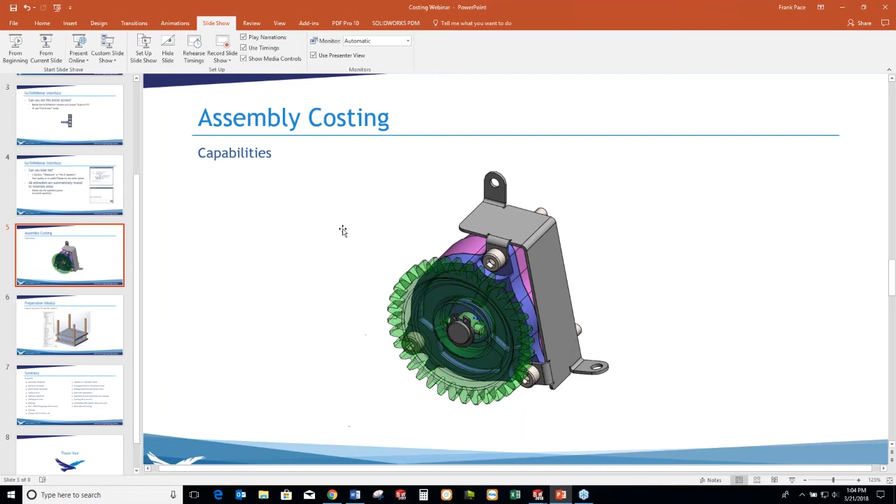So with this, basically what I wanted to do is go over some different types of parts that we could use with the costing templates, to see how that works. There's an assembly template, and there's also a machining template and a sheet metal template that can be used as well. Some other stuff has been introduced, and that generally depends on some basic information from the geometry of your parts.

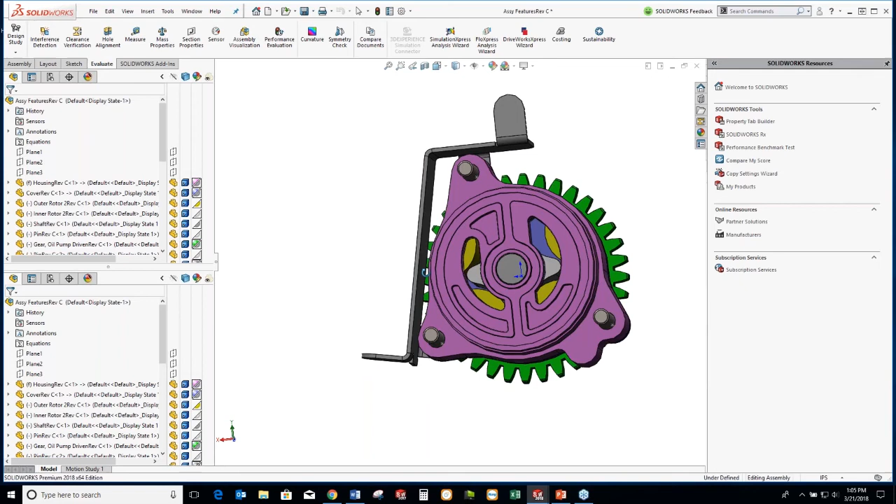So I have this part right here, or model, and I can take a look at some of the complications behind this model that create this whole assembly. Now, what I'd like to do is not only get costs down here, but also have control of the costs.

Costing is available for anybody with a professional license or premium license, and the premium license just lets you take advantage of the assembly templates. If not, you'd have to do it individually. In any case, there's basically a need to go through part by part anyways. There are just a few other extra things, and we'll go over what assembly templates would cover in a premium license. Costing is an evaluate feature.

So up here on the Evaluate tab, I can immediately start a costing for the assembly. Usually what you get over here are a lot of your default settings. You can see some of this I've changed around, and I've added these as I moved along.

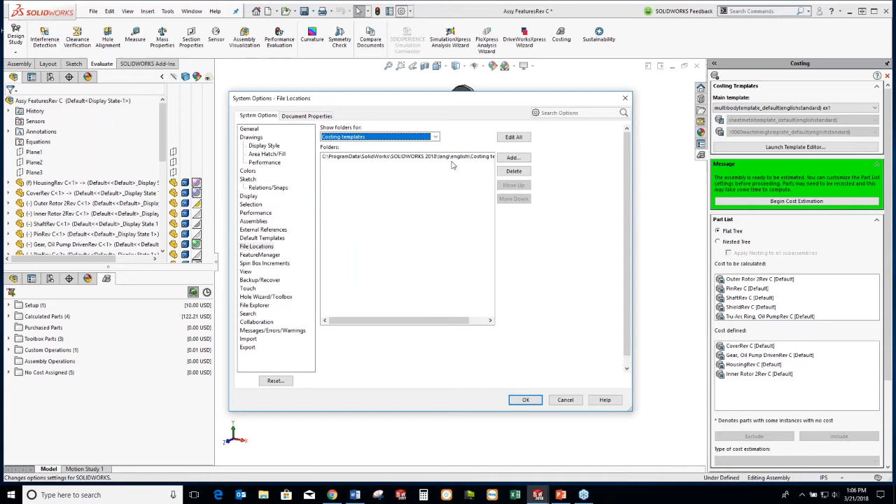Where those get saved are in file locations under costing templates, so you can go back to that, save it out, or change it if you need to. We'll take a look at all that. First, we'll just go ahead and set this up.

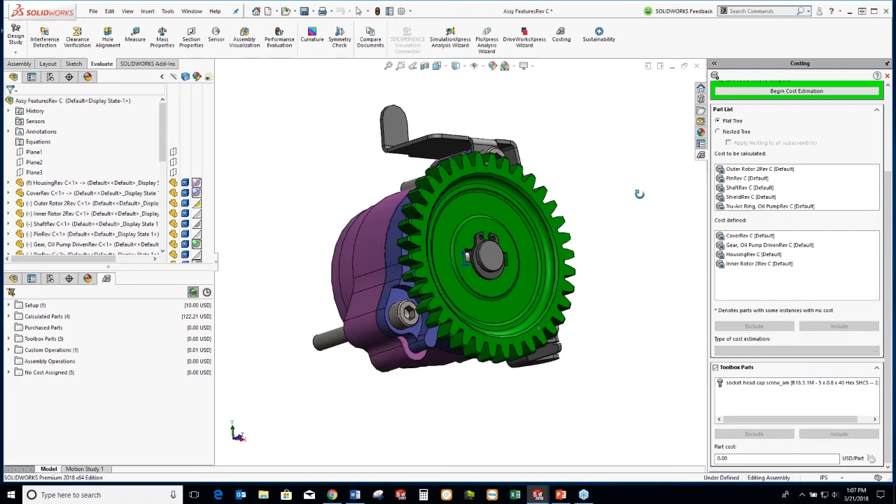One of the things I've noticed is great here that they've introduced is the toolbox parts. Toolbox parts were introduced in 2016, but if you don't have that selected when first doing a costing, it makes it a little more difficult to get that folder out. So what I have here in my assembly is three bolts that I want to account for.

Keep in mind that a lot of these parts, costs, and numbers may not be very realistic, so I'm just going to throw in some numbers here and there, and then we'll show where it's being affected. Here, for example, I'm just going to enter 225 for each of those toolbox parts. Then, when I hit Begin Cost Estimate, it'll pull the assembly template, which is tied to these two types of templates.

There's going to be a different template, one for sheet metal and one for machining. I'm going to go ahead and click on Begin Cost Estimation.

All right, so this quickly gives me some numbers, but it might be deceiving to think I'm pretty much done. Obviously, I have to go through and make sure things look correct. Not only that, but some of the stuff will usually go to a different interpretation, or the immediate first interpretation, of what that part can be costed out to be.

So let's first take a look at what's going on here, what we see. We've got current, previous, US dollar, and quick buttons for generating a report and doing a costing pack and go. We're not going to touch that. First, what we really want to do is dig in a little bit and see what this looks like on the inside.

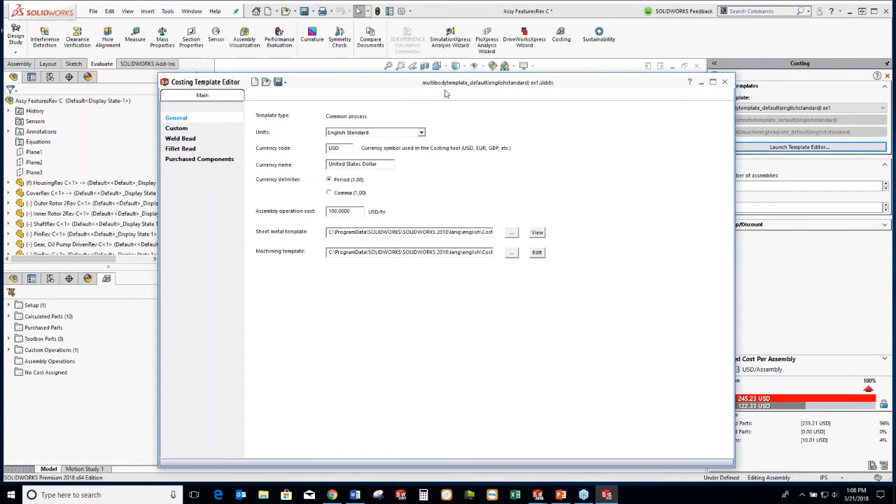So the launch template editor allows me to come in and make some edits. But one thing to note is that if you're starting out and want to try this for yourself, you'll notice it's going to say read only, so you can't really play with the template itself until you change that and save it as your own template.

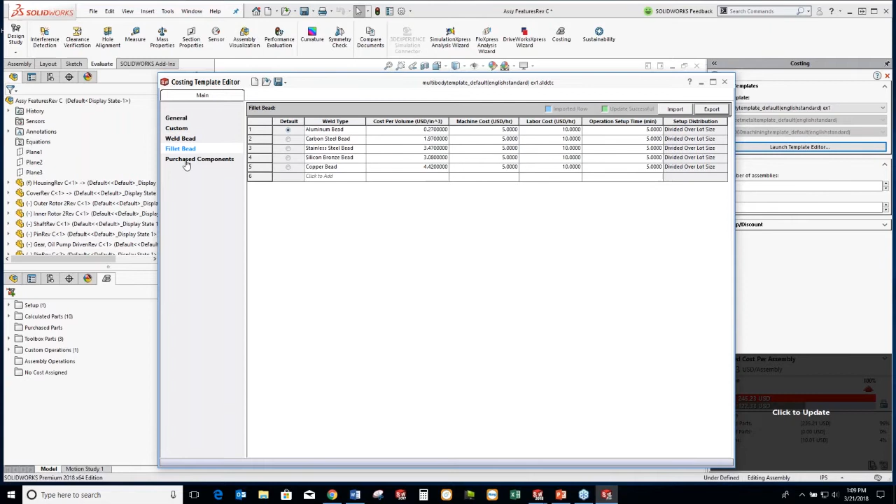After that, you can make changes. What you'll see down here is that you have the ability to add and take advantage of certain things. There's a whole gamut of things for the costing area, so we're not going to cover everything. One thing we're not going to cover is weld beads and fillet beads, but that stuff can be accounted for. And purchase components, but we can do purchase components individually, and we'll be doing that later.

So here on the main page of our assembly costing template, we've got a few options here. We can override with a certain dollar amount, or basically what it'll do is default follow these sheet metal and machining templates.

So I can take a quick look to see which one it's referring to. Here I was dumping some in there, but let's see. It's the sheet metal default English standard that it's pointing to right now, so I'm not going to change that. I could browse through, or I could take a look and see what that sheet metal has firsthand.

So that's kind of a neat thing. Basically what I did was click on the button next to that browse, and then it shows me the tab here. This wasn't functional in previous years, some of the earlier versions and things like that, so that's pretty recent.

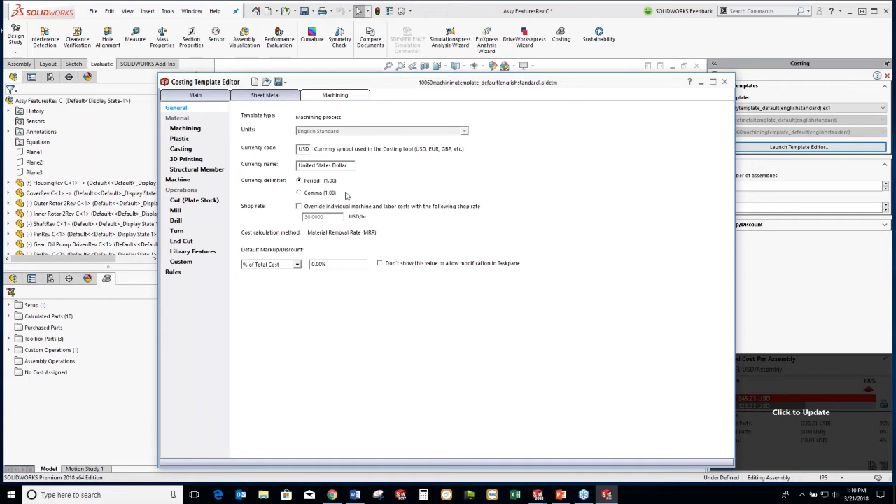If I go to edit the machining, I can take a look at what's going on over here. So basically what I'm going to say here is, for the sheet metal, I'm just using the default one that's included.

In the machining, what I decided to do is just go ahead and change what the quantities were. For a lot of machine costs, they were charging, the defaults have them at maybe $10 an hour, and labor costs they have at about 20, something like that. So I just changed these all the way across the board so that all machine costs are $100 and labor costs are $60 an hour. Just throwing around those numbers, obviously different circumstances, different situations, right?

So getting off that topic now, coming over here, I'll click to update, and that will show me that I've got some of this stuff here costed out. As I float my cursor over, I can see what these costs are telling me. But the best way to look at this is to just start going through some of these parts one by one.

So I'm going to take a look at just this first housing right here, the housing part.

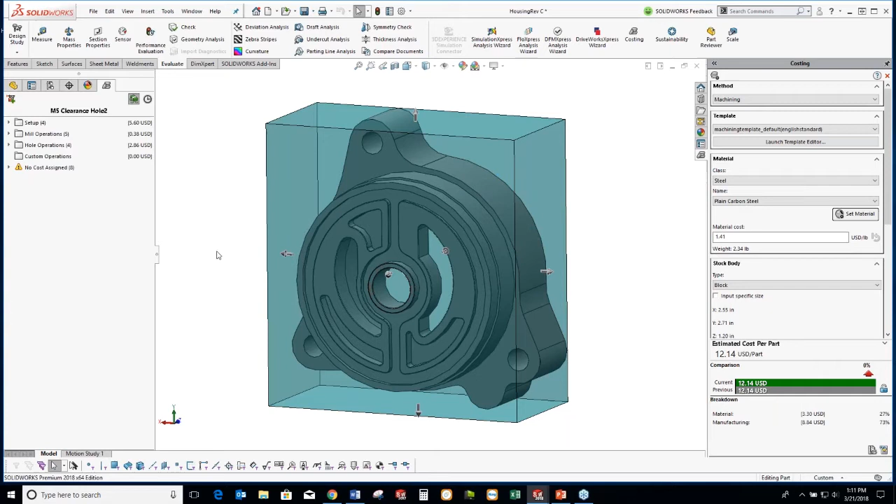Now here at the housing part, basically what I'm noticing is that there's a little bit of a warning here. So I'll take a look to see what that warning is about. And I'll find out that the message, it's a little small, but it's reading: there is no template information for this tool.

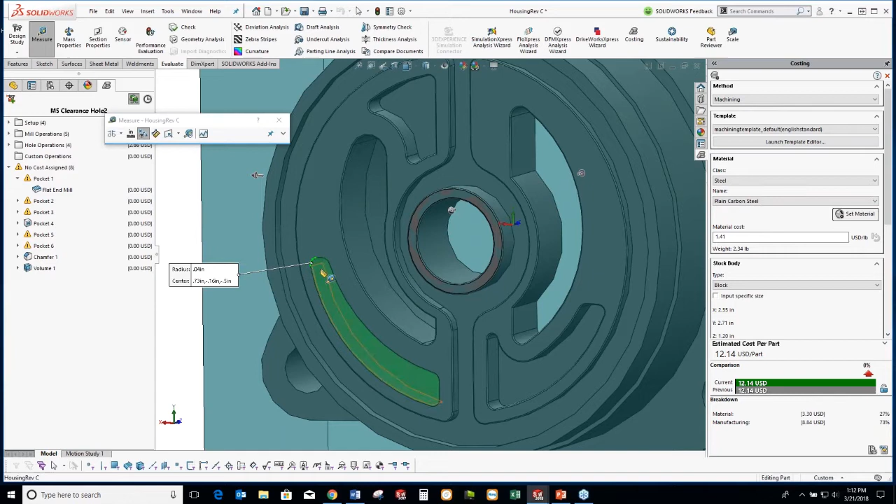And if I click on it, what I see is a pretty small pocket. Now if I wanted to, I can try to see what flat end mill I want to place in here. And this seems to be the problem here for this situation. What I have here at smallest is a 0.375 inch diameter. If I take the measure tool and just measure around here, I can see that that's a lot smaller, and I'm not going to be able to fit that in there.

So I've got one of two choices. I could switch stuff around, change things, or I could override some of these costs. So if individually I wanted to, I could just right click and apply a cost override.

And then those would populate into these other folders. So pretty much the general setup that you have for the costing on this side that automatically populates is that you have setup costs, which may or may not be included or ruled in by your template. Here, what the mill operations do is they'll pick out and look at pockets.

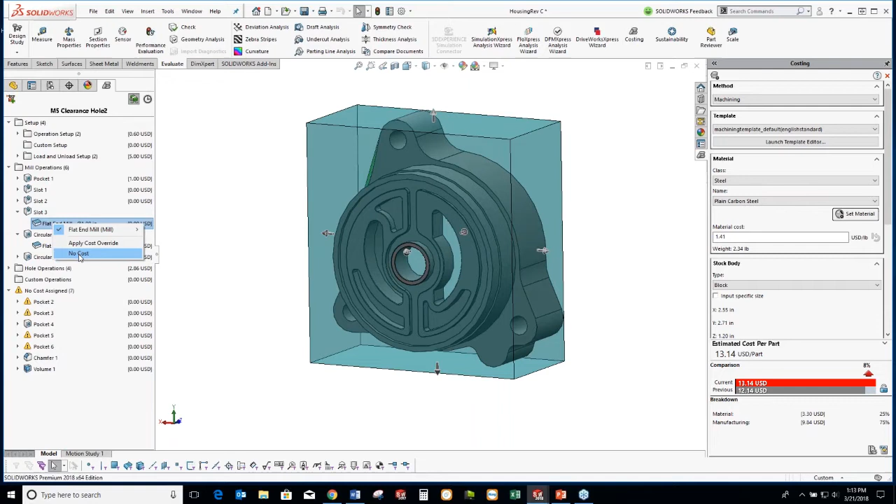And then we're going to look at how that's being calculated and how that gets figured out in the situation. You'll notice that some of these may not be correct, so you might want to account for that. You can sometimes take some of these out, set to no cost, for example, and then that would actually move it down to this area under the no cost area.

All right, so one thing that I could do is I could change the machining template that it's using. I could do that by actually pulling from this drop down. I could make changes if I wanted to. Let me pull this up here, and maybe say in the mill, I wanted to then change for steels, plain carbon.

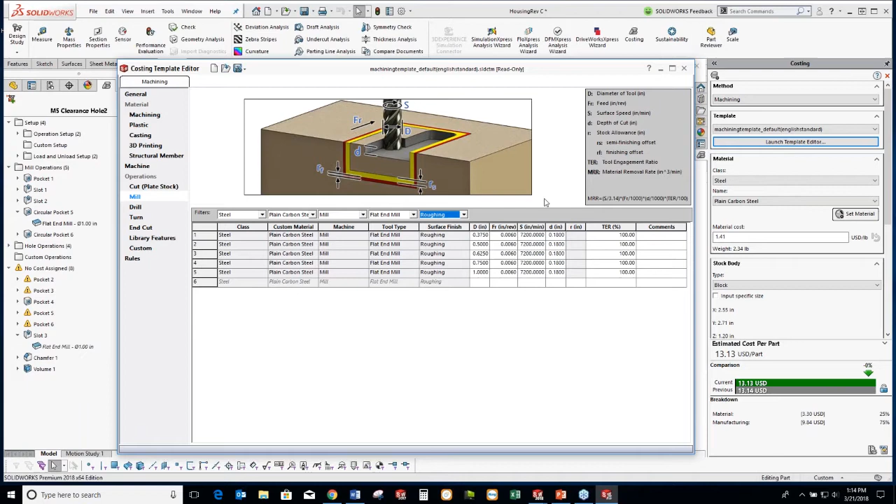So the drop down is really kind of the way to go about making these changes at the beginning. What I imagine is that people want to try this out. I would say try this out for a part that's already been quoted, and then take a look at the different options and try to see if you can match that up to your costs. And then you kind of start to break into a habitual way of cross-referencing this and making that consistent with your readouts.

All right, so how this is calculated is based on the volume that it's cutting out and the feed rate that is calculated from these preset numbers. So this could be controlled by you. You can make changes here as you need.

And if we wanted to go ahead and change this, here, by the way, you can click on the top column, and that'll set things up so that they're sorted, and then you can find things a little bit easier. Each one that you click on would then sort that through, and then you can make changes if you needed to. All of these are editable and can be changed on the fly if needed.

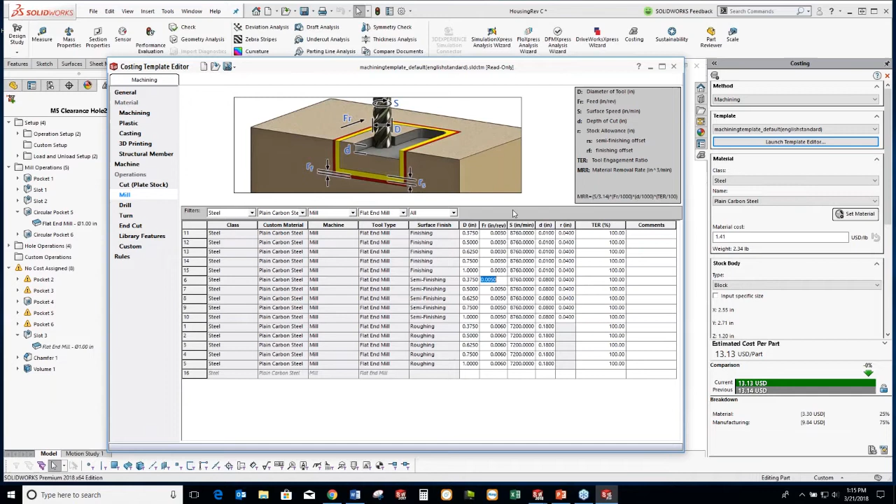All right, so what I did was I went a little bit out of the way here. And what I mean by that is that I just kind of played around with some of the stuff just to see something extreme. I think that's kind of my way to test things, is I'll go for an extreme value or number and just see how that works.

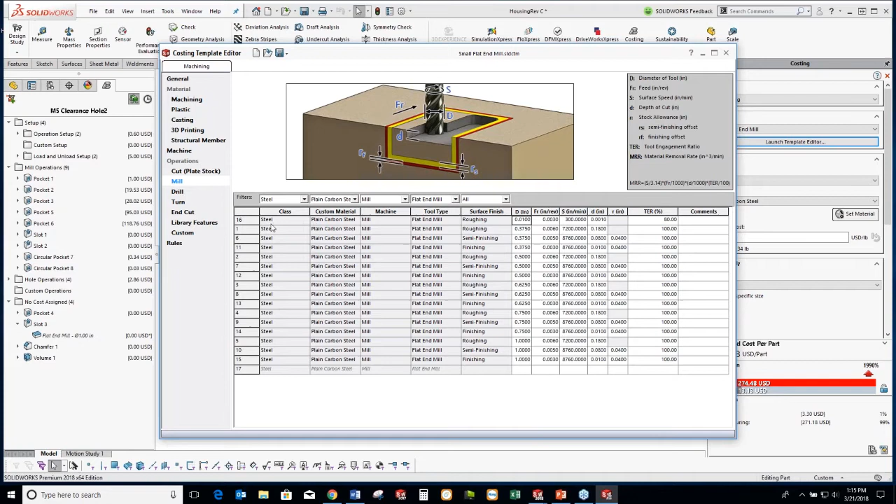So here, obviously, the 3/8 inch wasn't working for those small areas or small pockets. So I went really small here, something just ridiculous, and then gave this just for roughing and allowed it to cost for that. And you could see the cost kind of skyrocketing quite a bit. Just to give you an idea, basically a quick measurement here, this is how big this is. It's a pretty small part.

So, obviously too, sometimes with smaller parts, you might have things like this to cost out. All right, so these are just kind of samples too. Some of these other parts you might see would probably be better done as a cast or things like that. But the point of these exercises here is just to show what's happening, how we can control that, and how you can change that to better manage it.

So I think essentially what you would want to do is after you cost a part, just go through each and one of these features and see if you like what you're seeing.

So, for example, here what I did not change for this template, the template called small flat end mill, which fits in these small pockets, is the machine per hour cost and the labor cost per hour there. But you can see it right there. I know it's kind of a small pop-up window there. If you have your window kind of shrunken in, you might want to expand it. But I have the total cost for what that is.

And then it's saying, well, with that small of an end mill, it's going to take 3.96 hours, because of the feed rate and all that stuff. And so that is why it's costing at that.

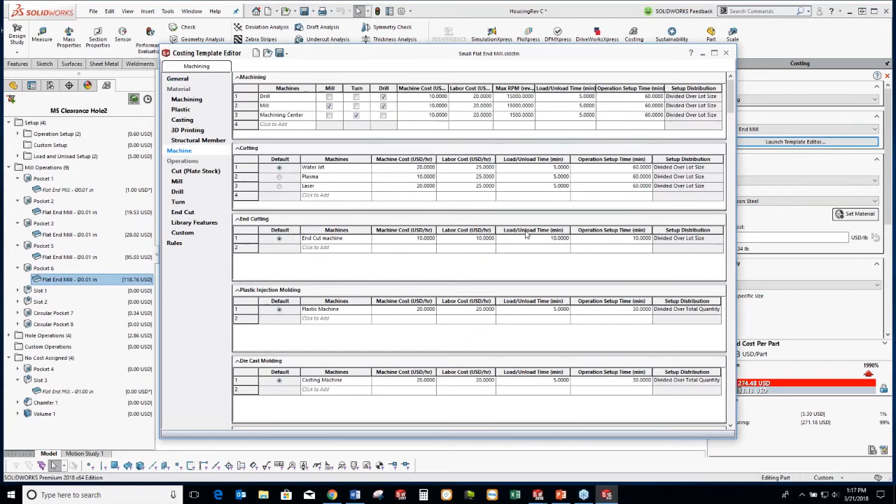I'm going to pull up the launch editor too again. The newer things in 2018, I believe, we have now tool engagement ratio percentage too as well. So this is another thing that could change the price there, or the cost, I should say. Here it's at 80%. So changing that would make a difference.

I'm going to go ahead and click out of there. Basically, the way I like to do it is if I make a change, I hit save and then change it to a new one, kind of like revving up or changing a revision to a template editor—treat it like a revision.

All right, so here we'll read through to see what the costing is about. So $1.41 per pound—obviously more of it is on the machining side for this one. The block can be changed and updated. If I click update, it'll take into account that new block size. I can input a specific size in here.

The preview stock is on, and it does have a lot size, the total number of parts. You'll see big differences if you have a setup for the entire lot or things of that nature. Markups, discounts—I could purposefully increase the price directly for one of these parts or whatnot. But I'd highly suggest figuring out how you're going to implement that into your template so you don't have to continually make adjustments for stuff.

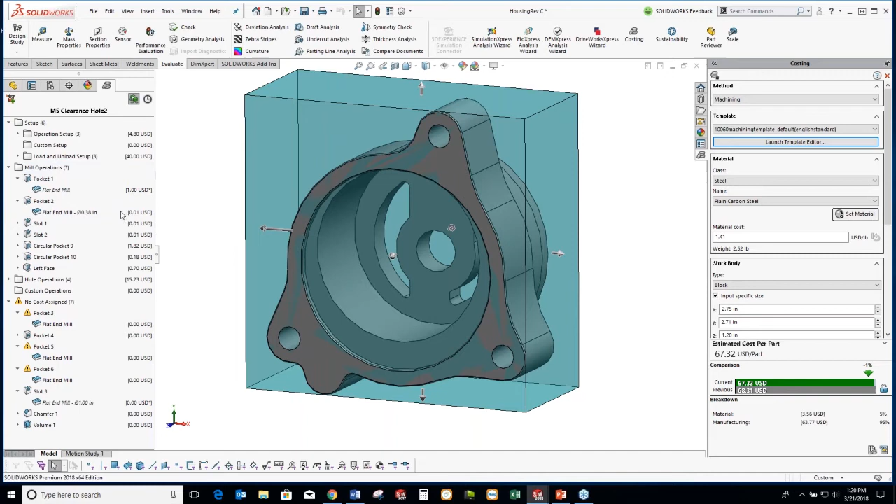So it's going a lot faster, taking care of that volume. But you want to see if that's realistic. Again, going through these, you can see on this end where that volume is taken out.

All right, so I wanted to have a slow introduction to, if you haven't used costing, what it's doing for you, or what it can do for you there, and how a simple part would be set up. So I'm going to ignore some of these smaller errors—I just wanted to talk about that. Hit save and hit OK there.

So now we're going to go to a little bit of—let's go ahead and hit up this sheet metal part. So if I open up this sheet metal part, it's immediately setting up the costing for me here.

I can pull down a different one. I can go with an English standard. I can definitely go to making some edits right away, and then of course preferably want to save that out as your own. Here, if I were to launch the template editor, like I was saying earlier, this is read only, so it's not going to let me make any changes. Be aware that even if it does look like you make changes, it won't save over to the same name—you'll have to save it to a different name.

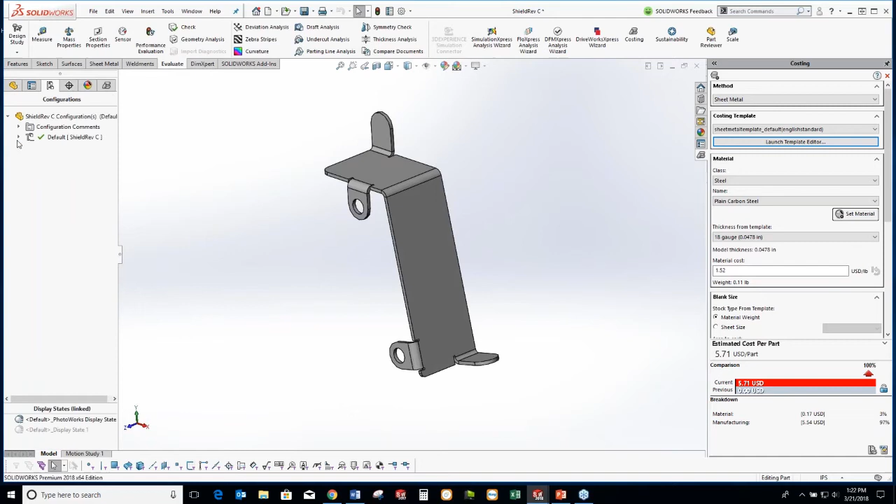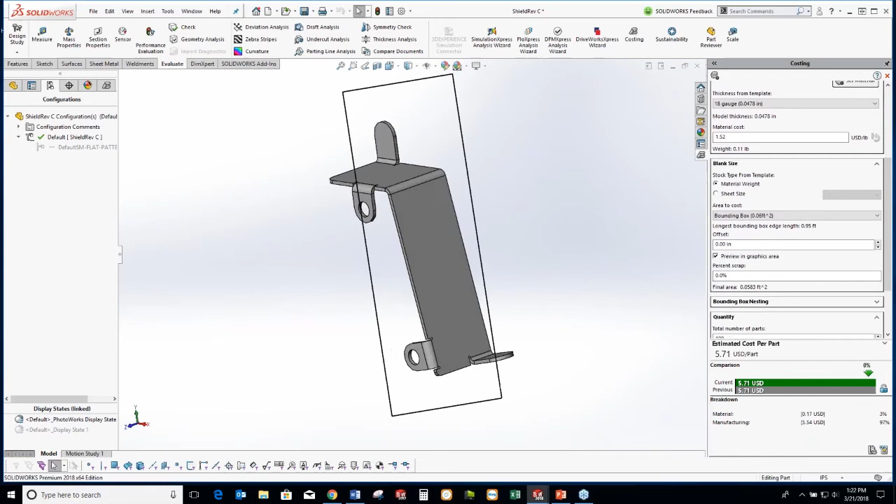All right, so this one is looking okay. Let's just see what the begin cost estimate is going to look like. One thing about this is I can take a quick look here. Earlier I made a quick drawing of this, so I have a default derived configuration that came out earlier, and I can immediately see what that flat and bounding box are going to look like. But in costing too, I can see in a preview here what it's pulling out, what it's referencing. If I needed to, I could account for percent scrap, offset this so it goes 0.1 outside the bounding box, and so on.

Really, the thing that also came out in 2016, it's gotten refined a little bit as time has gone by, is this sheet size here. So if I wanted to cut these out of a sheet size of 1x2 foot, 1x4, or 2x2, here we've got a few different options. We could do that, and what I've noticed is these are kind of set up for certain gauges. So if you don't see it for your gauge, it might be that for that gauge it's not there, but some of those can be put in.

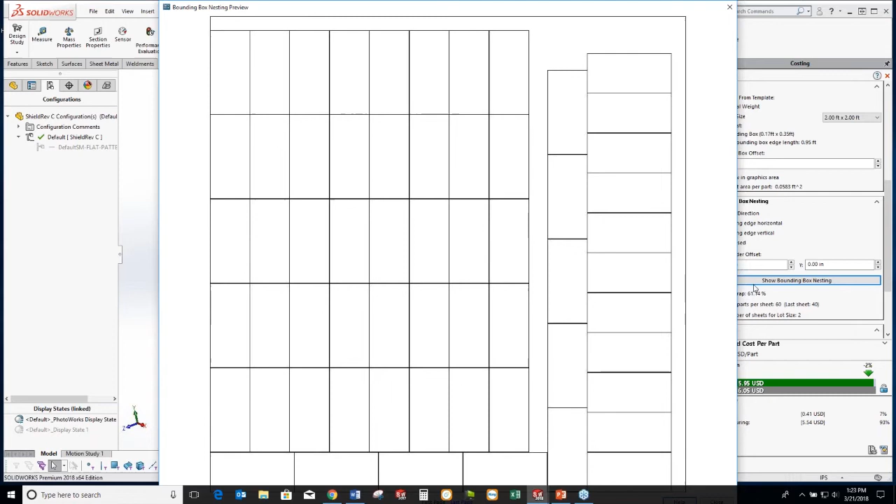So let's take a look at the bounding box nesting. All right, so this is another one that came out in recent years. I'm looking at 2x2. These are pretty small, about 2 by 4 inches. You can kind of see these fitting in as best as the computer thinks it can put them in there. Obviously, sometimes the human touch might be able to improve on that, but it is kind of neat to see firsthand what that can do for us.

Okay, so here's a sheet metal part. Quickly, I guess we didn't look over here at the template. In the material, you kind of see that there are different classes of material that will go in here. It's a sheet metal part, so we're not going to see stuff like plastic or wood. But of these, we've got different kinds of options, other metals, select SOLIDWORKS material here. So I believe these are being controlled through the SOLIDWORKS materials.

Okay, so bends. We can kind of quickly see how some of these are being set up for bends. If I narrow in, I've just been using the default material, but I can switch that and it updates immediately.

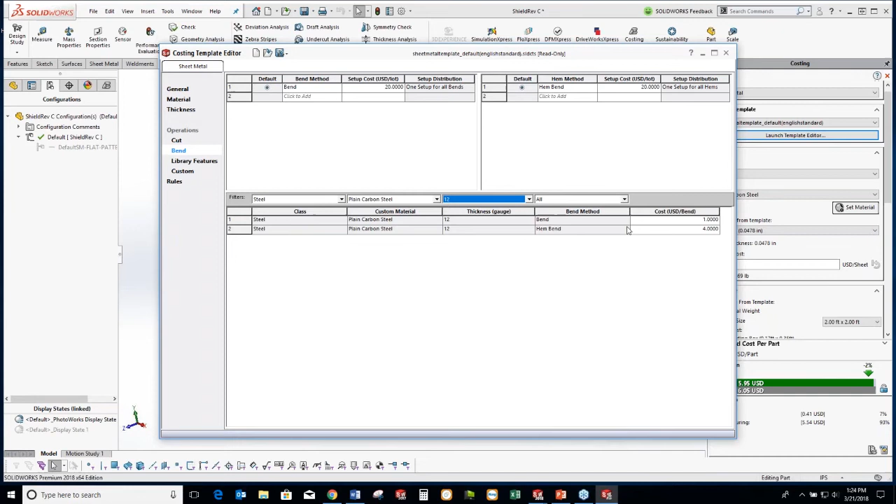Here we're using about an 18 gauge, and it would just let me know where that's at, and if I wanted to, I could quickly change that too. But again, this is read only, so I'd have to go through the trouble of hitting save as, and that's not too big a deal. But for one change, maybe you might want to think about how many changes you're going to make, just because each one will then create a new file type that you're going to be playing around with.

Okay. All right, so back to the whole assembly and getting this whole thing together. We've done the sheet metal, played around with end mill size. We've seen here that we can lock in the baseline a little bit. If I set it here, then I can see afterwards where my change is, just to remind myself where that location is at. That's been around for quite a while.

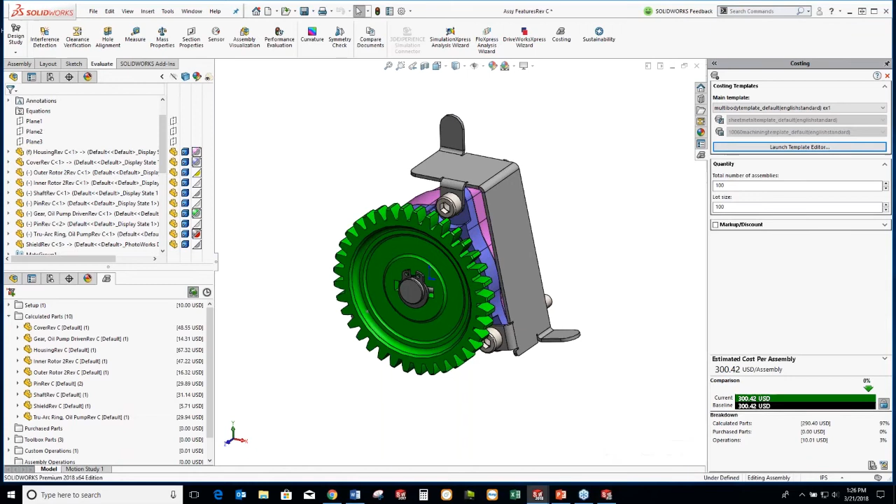We did notice that at the assembly level, we were able to create a toolbox folder and cost for these. I don't think that took, so I would have to maybe override that cost. So that's one thing that I did kind of miss. I might have hit a check mark or something ahead of that.

But we see some customized operations. This kind of came through from the template. It's just a penny here, but I could definitely override that and say, no, don't cost that out. I don't want to have anybody start worrying about that. Purchase parts, we don't have anything in here just yet, but we'll take a quick look at some of the stuff that might be easily purchased.

So we'll take a look, say, at this pin down here. And what's neat to see is that, okay, it's thinking, but obviously this is a stock part that maybe we might not consider. Let's just assume first that we would want to consider machining this for whatever reason. So we could start this begin cost estimation and move down here, and there's actually stock body types that you can pull out from.

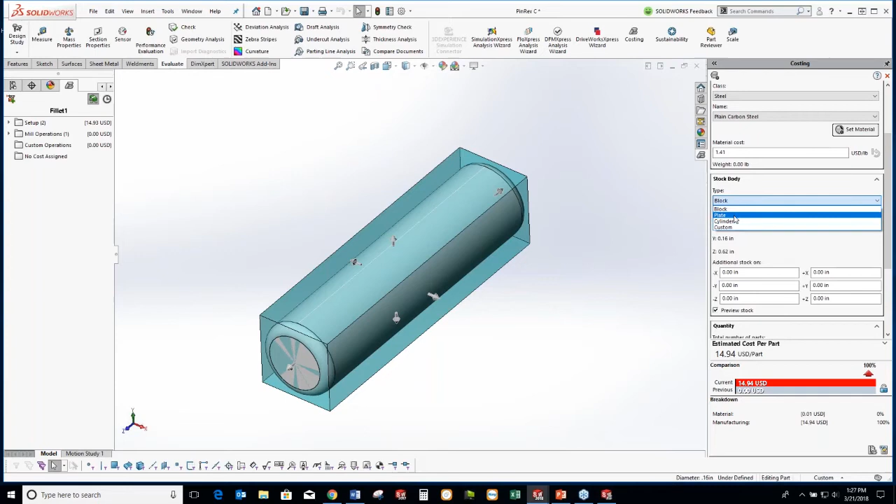So custom plates would be predefined inside your template. Cylinder is going to match up right here typically, and then you can maybe change that around too if you need to. So here, assuming that it'd be milled, let me update this first. Here we go.

Yeah, it was going to be milled. Now it's on an OD turn and two OD turns to kind of take care of both ends, or the whole part. So that's pretty new. That happened in 2017. I'd say a lot of the changes did happen for 2017.

That would then kind of start to allow you to start controlling this. Before then, we weren't really able to take care of ID, OD, stuff like that.

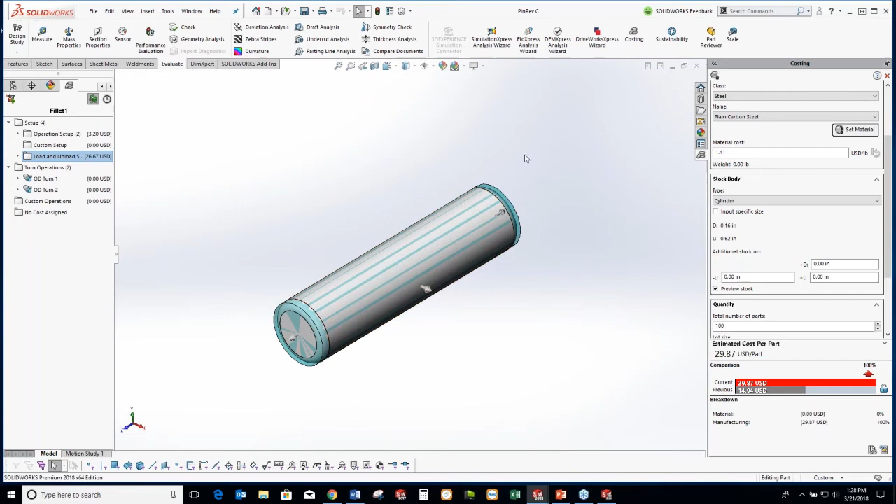So the price is pretty low, but the setup is really where the cost is hitting up. Basically we're going to consider changing this around to a purchase part. But one neat thing is that if you ever needed to consider coming back to this, it can be saved. It will first change the cost on the assembly.

But then we can kind of reverse that by pulling on this, just doing a right click, and setting this up to apply part settings and set this up as a used purchased cost. So say that just costs 75 cents to purchase.

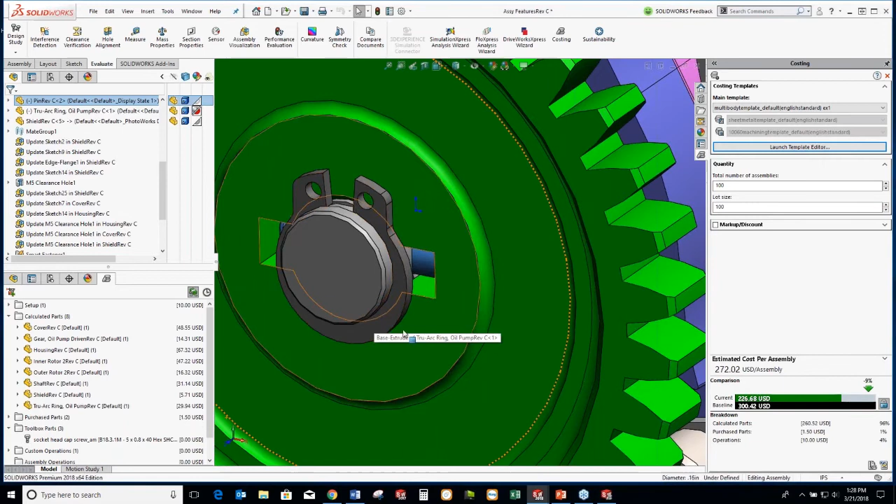Then down here, I've now created a folder that has a pin there to purchase. Something like this too, like a SnapRing, and here I see that it's going to get estimated as a part.

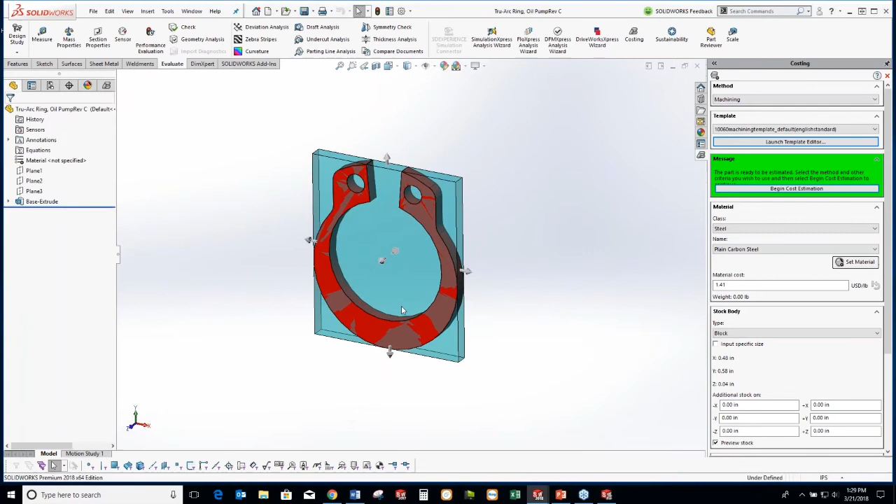Maybe if somebody needed to really have this customized, that's great. This one I'm going to consider to just set to the side, basically. So now this part right here, I can just select that, apply part settings, and use purchase cost.

I'll put in $1.25 for that. Other stuff, maybe like this shaft, maybe this does need to be taken care of.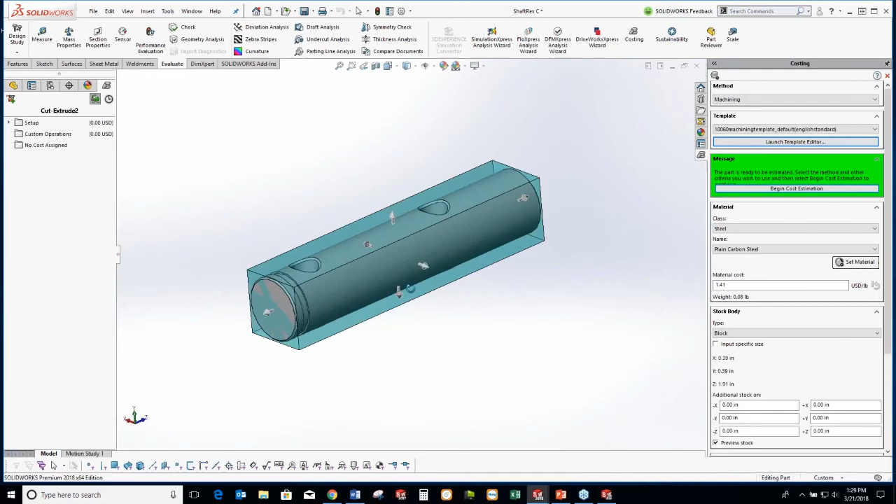So kind of a cool thing is how things are being considered, how they're being set up ahead of time. So here right now, it's a block, right? We can change that to a cylinder before we even begin the cost estimation. We'll want to get to that though, because we want to take care of how these holes are being taken care of. So I'm going to hit begin cost estimation.

And you'll notice here from the mill side, basically we're getting that it is a flat end mill. Yeah, possibly, maybe. Another option too would be great to know that we can change that around to a drill, and we certainly can if we just right click up there and whatever choice you want to go with, it moves it to a different folder.

You'll see a hole operations folder down here, and that could very well influence the price and just give you some more accuracy to this, more consistency. So here, convert to drill, carbide drilling.

Mainly just for example, and also let's take a look here, OD groove. So it's accounting for that groove right there. Again, so that's considering the volume taken off.

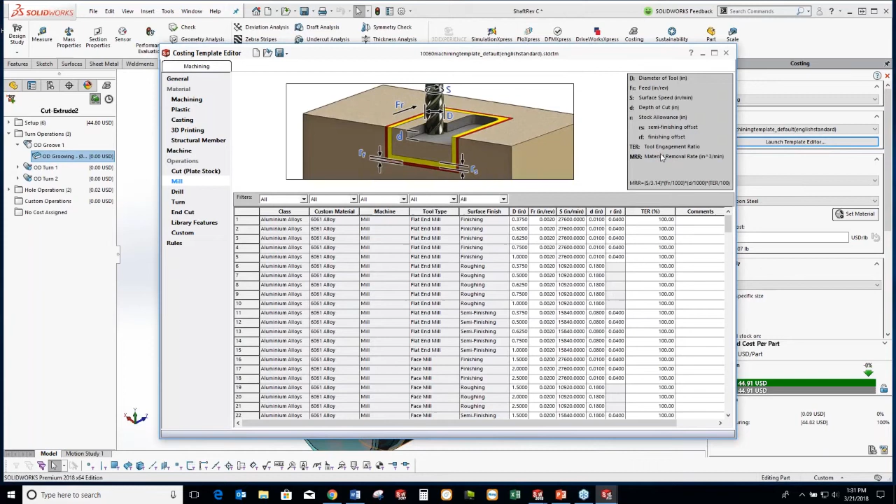And we'll take a look at the editor here. So we didn't really go through all of these here, but essentially you've got your tool engagement ratio, material removal rate, and that's different for each one of these setups to drill. All of these can be controlled.

Turning too as well. It has a nice visual feedback of what the variables are referencing here, and then the description here on the side, and then you have under the columns for each and every one of these. Again, with the flyouts here, you can filter, narrow down, and then you can make changes as you need to.

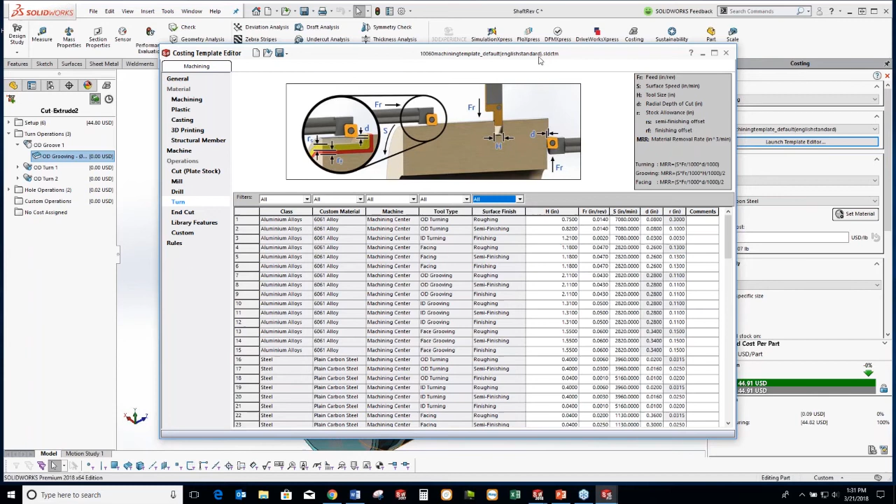So my suggestion would definitely be that these get set up on a trial basis first. So obviously, you want to see where they match up, see if they match some of your previous quotes or any costs that you've had to incur for creating your machining there, and then seeing how that matches up. And then those templates can be set up just for certain items.

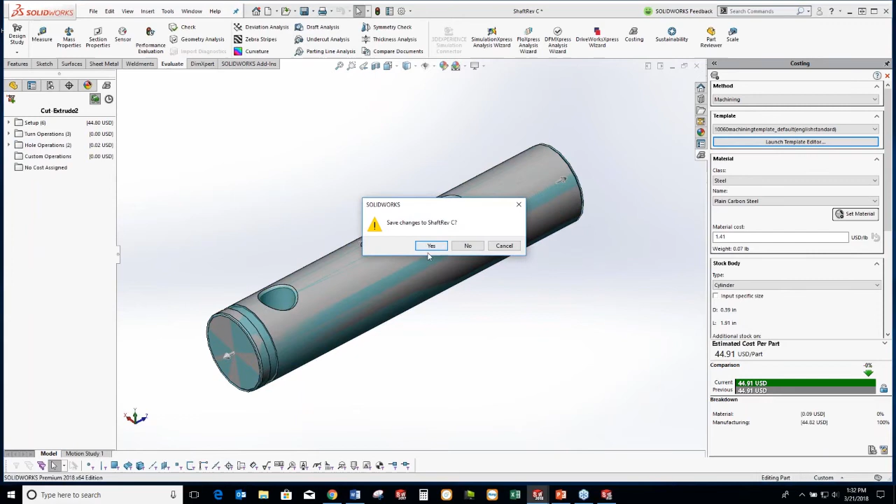All right, so we've played around with some of this stuff. Let's say, for example, one of these, I would want to actually make some changes here.

So a neat thing that we can do too is actually consider where some of the stuff is at by clicking on it. You'll see that it's highlighting. Just like a lot of stuff in SOLIDWORKS, that wasn't possible some years ago. So this is a nice update on the feature.

And now that I kind of see this center hole right there, maybe what I want to do is keep track of that. I'll call it a center hole.

And the way that I renamed it was just to click on it and then type in the F2 key. So clicking on one of these, just get it highlighted, then I type in F2 and I can rename it if I want to.

All right, so this center hole, it's not bad that I've got a drill here, but what about these other ones right here? Let's just assume that maybe I could get these tapped holes and then get those screws kind of threaded onto that part. So maybe that was a design change. Maybe we weren't going to do that at first, and now we want to change that. So we can actually add that operation here and have that set up to whatever that is. I'm not sure, that's probably a lot bigger than it's supposed to be.

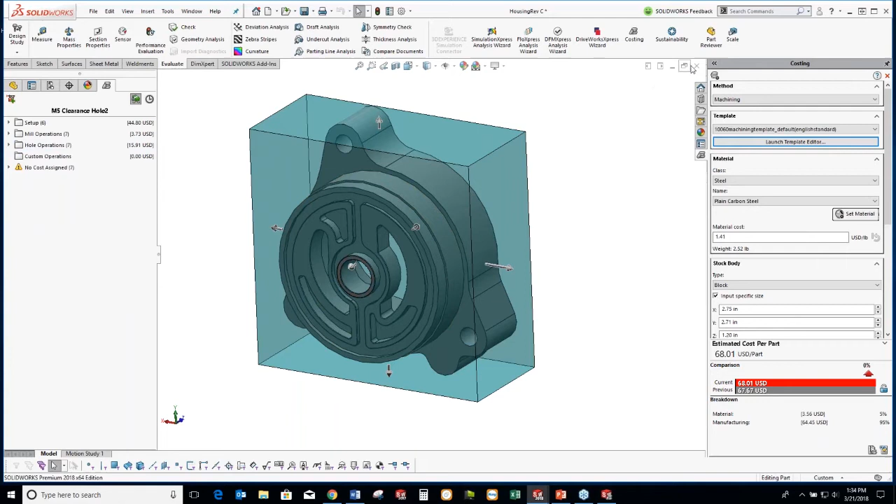Also, the little warning there is just kind of telling me that it's not to the exact size, so it's just kind of a feature there to let you know you might want to review it, and as long as you're okay with it, you can move on. So it's just for demonstration purposes, so we're not going to worry too much about the small details.

This thing still has some other parts. So if I were to go through all these, it might take a little bit of time to go through all of that. I think what I want to make sure is I hit target on time for all this stuff. I've been looking at an outline I have here on the side, and looks like we've covered a lot of this stuff that I wanted to cover.

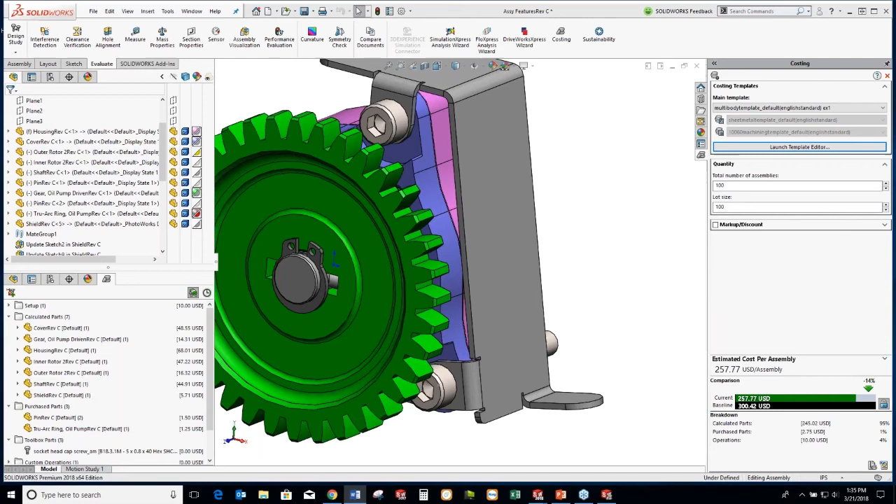Just looking at the sheet metal template, turn, introduced in 2018. We've also looked to see how you could change from mill to holes on that shaft part there that we had, or pin with holes. Then we also had changing to purchase parts, so that can be done over here just with a right click, change part settings, or apply part settings, excuse me. Also, assembly operation is one that we can also do for this thing.

So a lot of these I'm going to kind of skip over. We didn't quite go through all of this stuff. This one I'll comment quickly. This one does take the system of mine about a minute to go through, and it has to do a lot with all these pockets that it's trying to calculate for. And then I kind of change that around to a cylinder, and that's actually what takes about a minute. And then it does the ID and OD for the other side too as well.

But if I click on that, that might kind of hold up the machine for a minute or two. So I'm just going to wait on doing that. Might do that at the end and just see what happens. Because running the webinar, I'm not sure if that would halt stuff to a complete stop there.

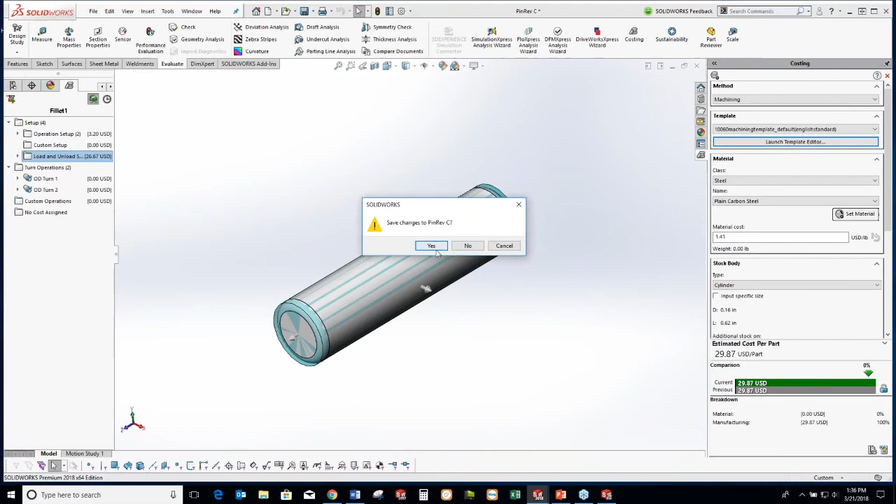But the one thing I did want to bring here, the current operation has to finish. Okay, so maybe I'm already being halted here. Let me go back and see what's going on. Okay, now it looks like I can go ahead and select.

All right, so I'll right click here and add assembly operation. Let's say we wanted to start considering, this is a design that we were in charge of and putting together, machining or whatnot. And now what they want to have us consider is putting this together ourselves, right?

Maybe now we want to consider putting that together. So we can consider how long it takes, maybe estimate say 5 minutes or 9 minutes. You'll have to calculate that out as seconds if you were to use this selection, or have it go to each selected component or the entire selection. So here in this blue box, I'm just going to select all of these, and that populates in that box.

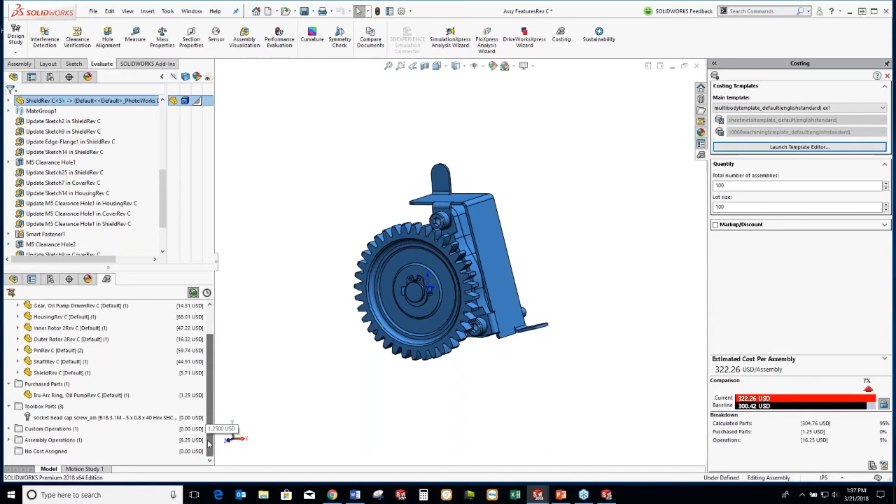The rate is at $100 an hour. Let's say we can get this down to $25 an hour. When I hit OK, it calculates that and sets it to the side for me to worry about later. So now it's not something I'm having to keep track of on an Excel sheet. It's there for me to see, and I can see it in the report, which we'll see at the end.

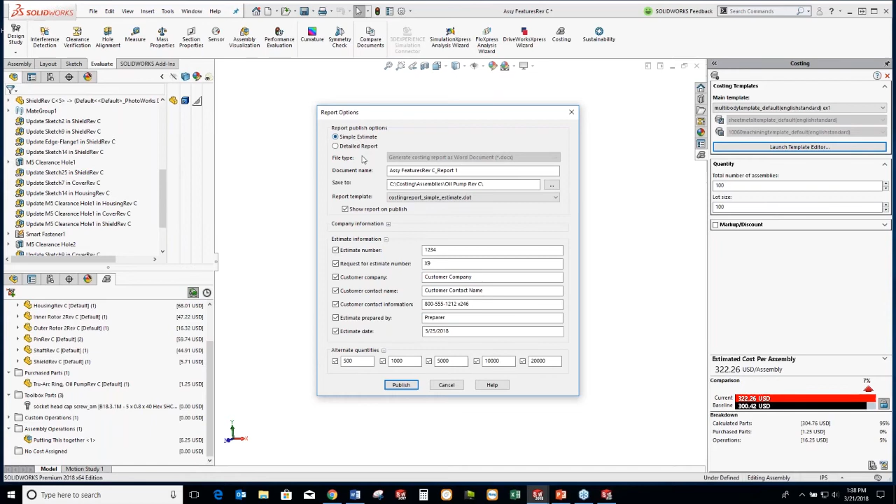So speaking of report, we'll go ahead and select that now. One great tool they've added is alternate quantities. Alternate quantities came out in 2017, and you'll see that here. I can press the button - this is remembering what I picked last time I was playing around with this. I'm going to go with the simple estimate because that's typically who we'd give that for. If you want a cost estimate, maybe we don't have to go through every single detail and the cost breakdown of each and every end mill. We just want the big numbers there to decide which direction this stuff is going to be going in.

So obviously with the kind of costs we've got, we'll be pretty rich in no time. That's what we all want to hear, right? I'll still be doing this job, but I might be taking more vacation time, is what I think I might do with this kind of quantity.

But all kidding aside, this is broken down into how my template took care of the part. Obviously a lot of these parts would be either purchased or customized, but some of this stuff might be cast and so forth. So not a very realistic part, but just to show how those estimates are going to be populated in here.

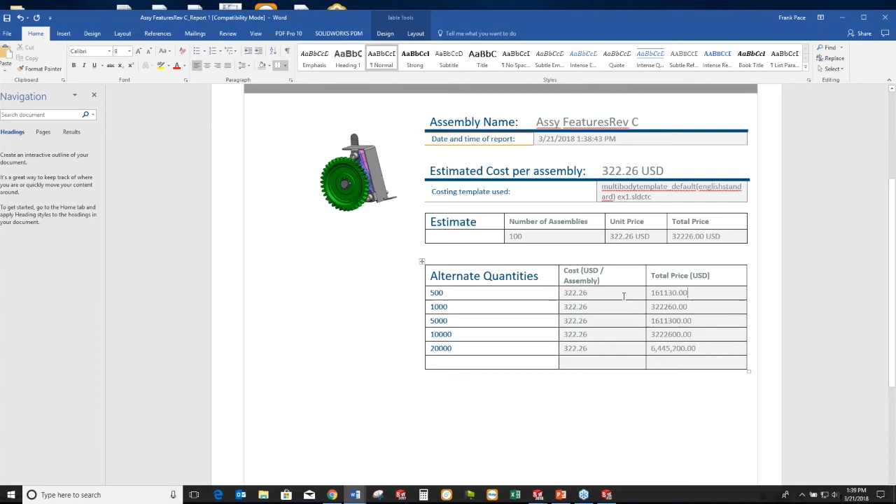Quickly and efficiently - so this is a simple one. If you want to take a good look at what you've got going on, you'll want to make sure the report is a little more detailed. So I kind of quickly ran through that. I'll go back to generating the report, and on a detailed report, when I hit publish, it'll come out with more information on that.

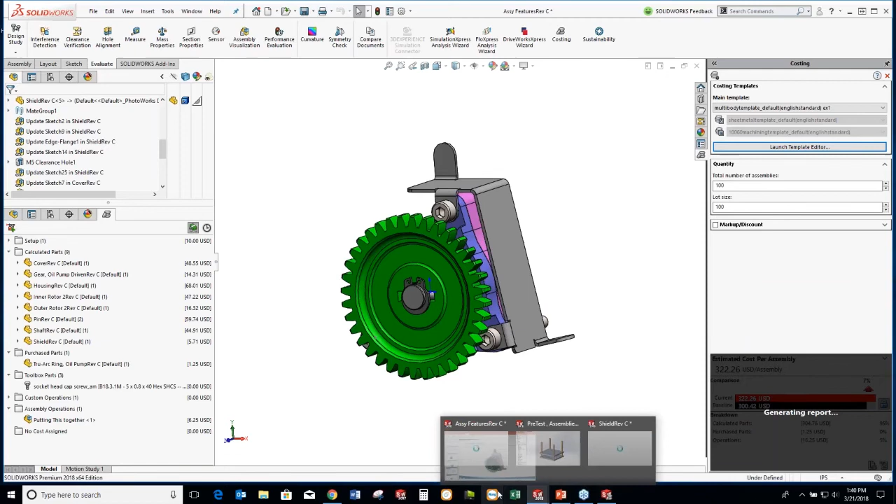All right, also what I want to go through to finalize this is to go into an assembly that's going to be driven by equations. So last year some people came up and said, hey, this is all great, but the problem is we have to have this all modeled up ahead of time, and we're trying to get quotes out sometimes before we have the entire model set up.

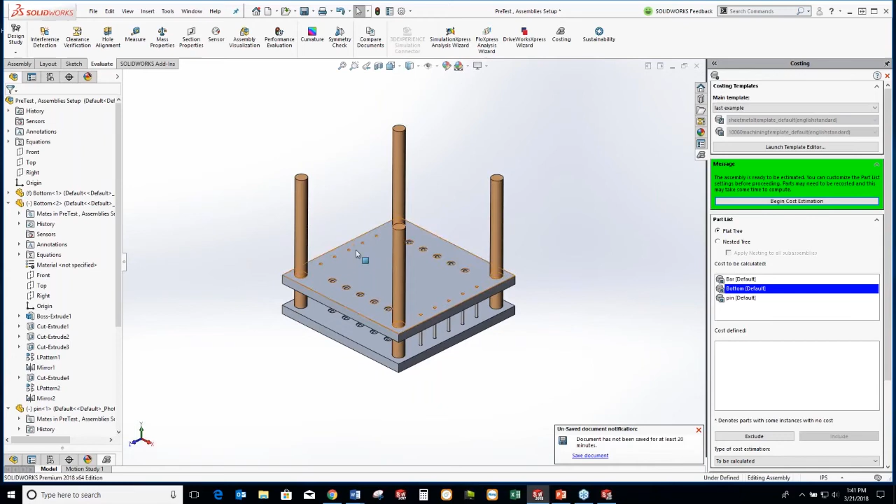So what I did was make a very crude setup of a set of slabs and rods that could represent the basic start of what could be an even bigger tool. This is just my interpretation of a dumbed-down assembly that would represent maybe a tool or any other kind of assembly where things change but there are consistencies. So let's say on these tools we always have these 4 rods right there.

And what gets changed are maybe the number of holes that get drilled into these parts, and that expands as the part expands. So a really neat way to be able to do that - I actually experimented with this part and started at the beginning, and what I did was essentially create some equations at the part level.

You can actually create equations at the assembly level, but because I did it that way, I'm going to have to edit this part and pull up these equations right here. So I'm going to go ahead and pull up manage equations, and quickly show there was a lot of stuff I didn't end up using.

Basically what I did was tie that to these linear patterns and just told it to take the overall length and divide it by 8. It kind of gets close to whatever number of instances that is. The perfect number would be 3.125, but then it gets close and divides that number.

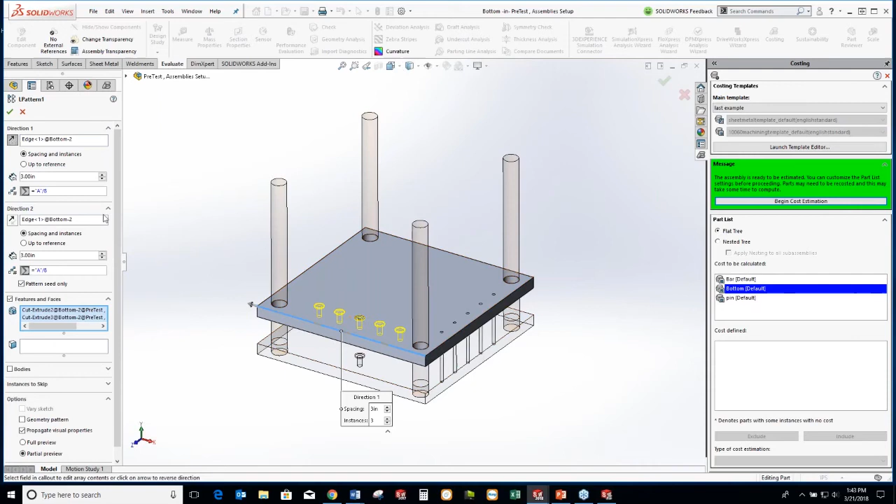So what I'm thinking is that if you have these kinds of situations where the tool changes, then we could get a cost for this whole thing. We do this begin cost estimate. With simpler parts, this is going to run a lot faster.

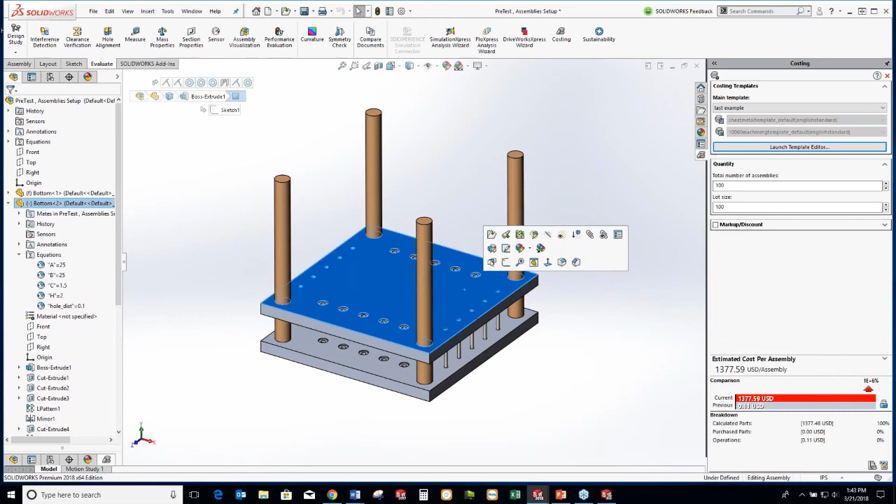So we're looking at this, we can go through. Things look pretty straightforward, let's just assume so. Things look more straightforward here for each part. Something like this is pretty easy.

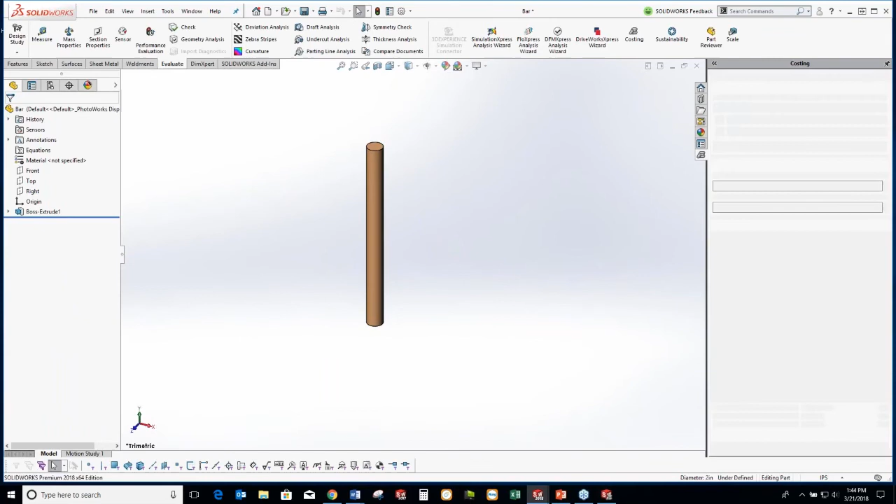We'll hit the save button, that will make sure it updates in the assembly. This one too, before we really get going, you want to make sure this one's being estimated correctly. Obviously here it's a block.

Unless you really had to, probably go with the cylinder, right? So we'll save that to make the changes on the other end.

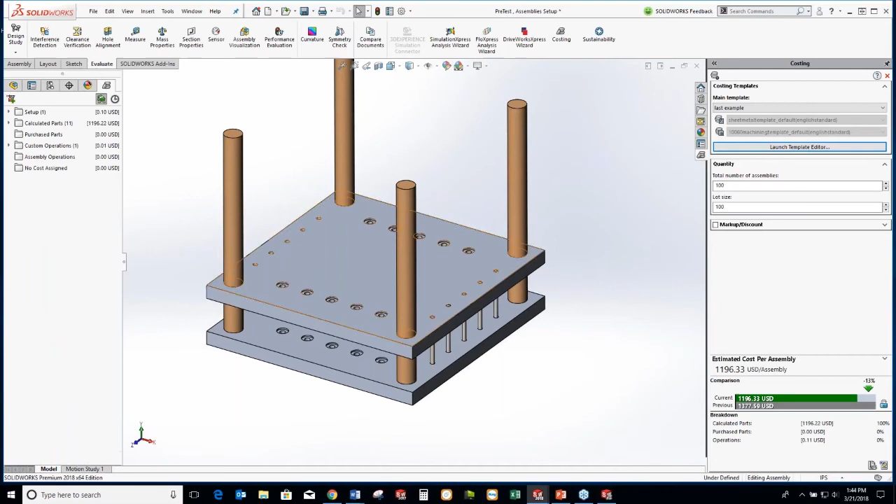Here's a pin, so maybe something like this then just gets broken down into, let me pull this up over here, maybe a purchased part. So I've got calculated parts over here, and this pin, I'll just change the apply part settings, use part, and maybe say 4.5, I don't know, $3 or whatever.

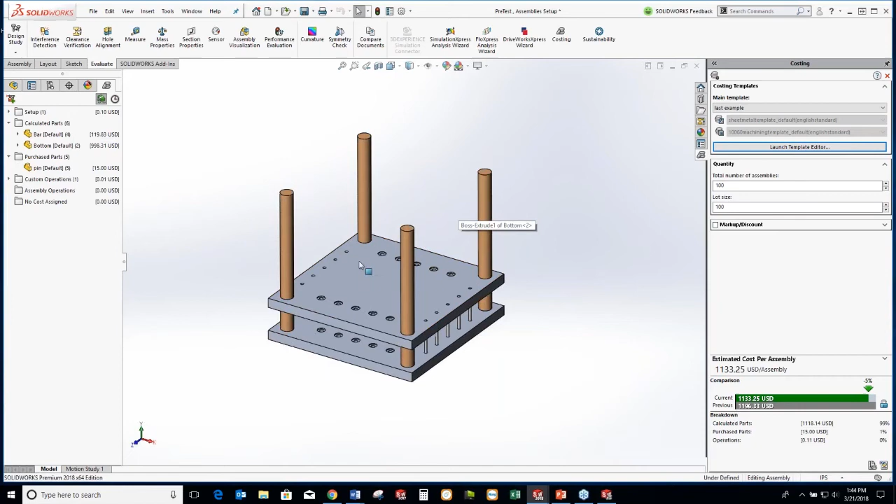Okay, so now that I've got this set up, I'm going to go ahead and start editing the equations for this guy.

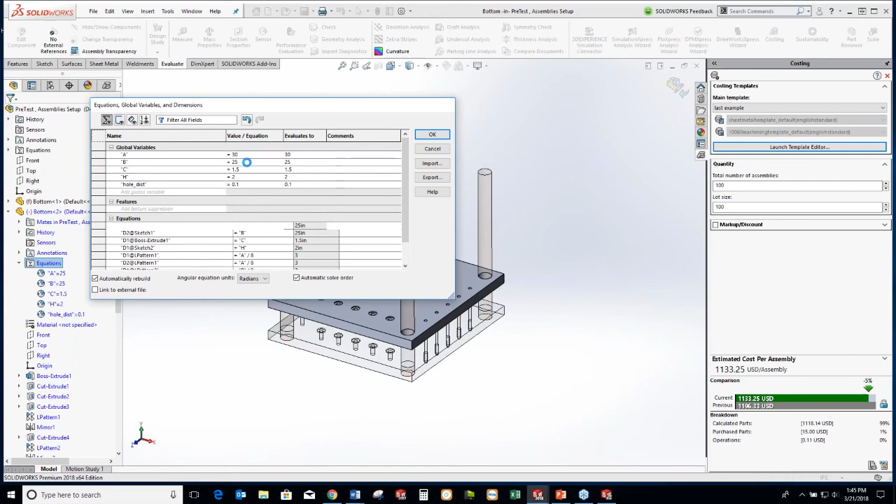So say, for example, it's at 25 by 25 right now. If I wanted to, I could change that to 30 by 60. I'll keep this over to the side, giving myself a heads up what this is going to look like. As soon as I hit OK, it updates that. And then this is all being set up.

So obviously this could be very fun, pretty much consistent with maybe the larger the tool, then the more the cost. It's updating. If I go over to this part, it's easy to see that it just quickly updates it, hits save, and then I'm back on board going back.

As long as those drill sizes and everything were the correct sizes that I'm okay with, now I'm flying through on being able to maybe quote somebody something a little bit faster. And just as an idea, maybe some stuff kind of changes.

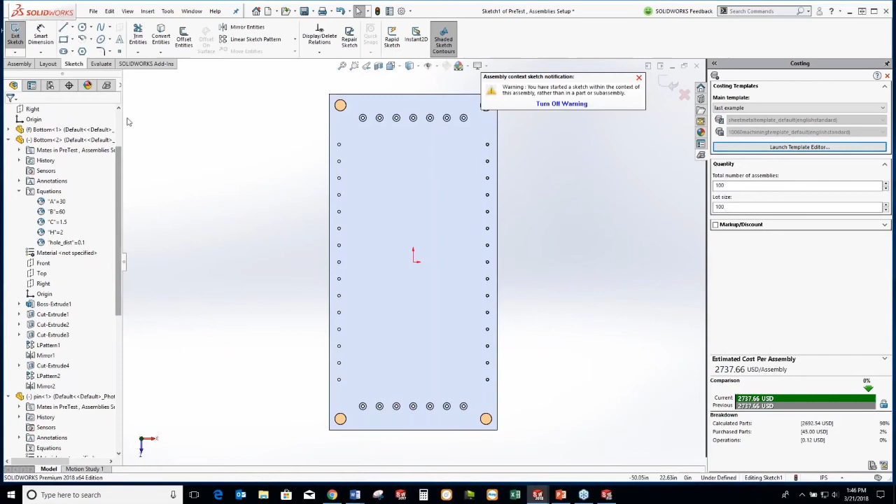Here, for example, if I needed to, I could maybe cut out something that's kind of crazy, maybe needs sharp corners or whatever it is, and I'm having to figure out how I'm going to put that together. And it turns out that maybe the best way to do that is with wire EDM.

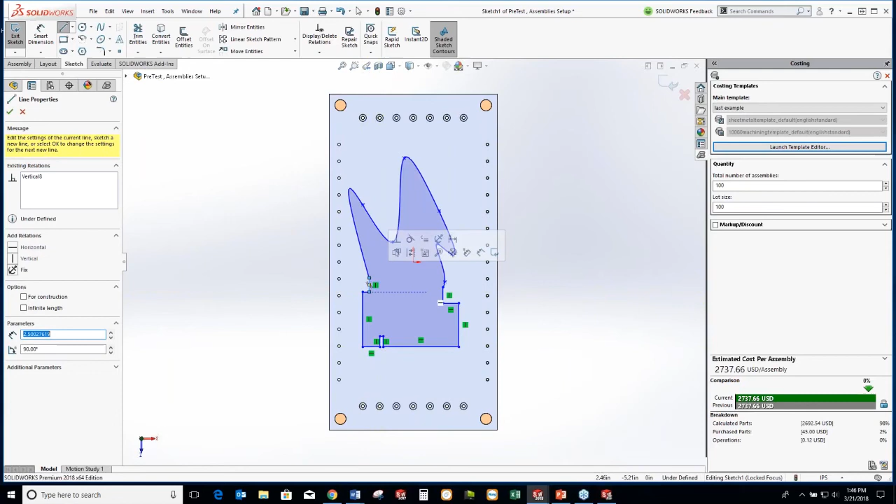So I can actually take into account for something like that. I'd have to just make sure that I pick all those edges. So say, for example, and this is basically a nonsensical part here, but I'm just playing with it to show some ideas.

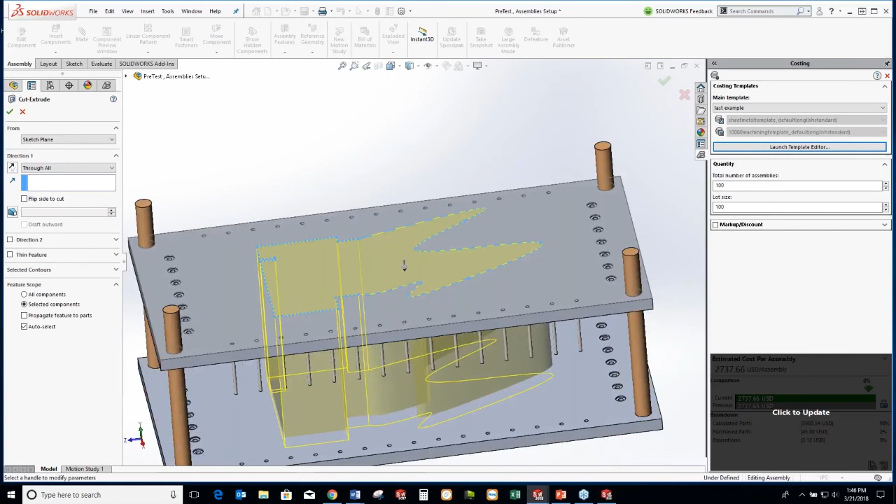I'll do an extruded cut through both of these, flying through all of that, and I'll even have that propagate to the feature parts, so it actually changes the costs on some of those there. So the first thing it's going to want to calculate this as is, as a pocket.

So it doesn't even really take into account some of these. Maybe it does, it would just take maybe longer to get through, or some of these sharp corners. I don't know what I left in here. So let's take this into account. Let's look for it.

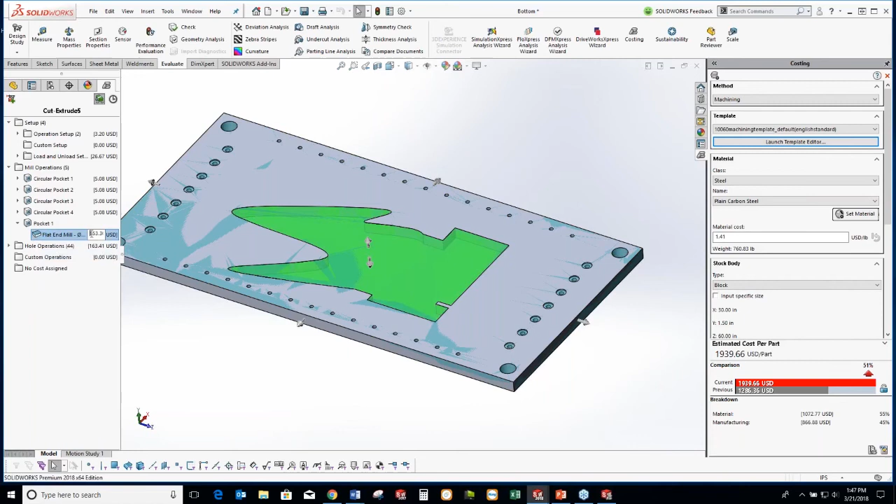There's the big pocket there at the end. I should be looking at the last feature, I guess, since that's the last thing that got added in there. So I'm going to override this. Oops, my mouse went over the mouse pad, and I'm going to set that to 0.

Because what I'm going to do is I'm going to actually customize that. So in these custom operations, I have not just different choices I can pull from, but I can also go ahead and name this myself as I'd like. So let's say wire EDM.

I'm running out of time, so let me quickly go through this. Let's say setup cost was $100 per part assembly, and at $30 per inch of the edge length that I pick.

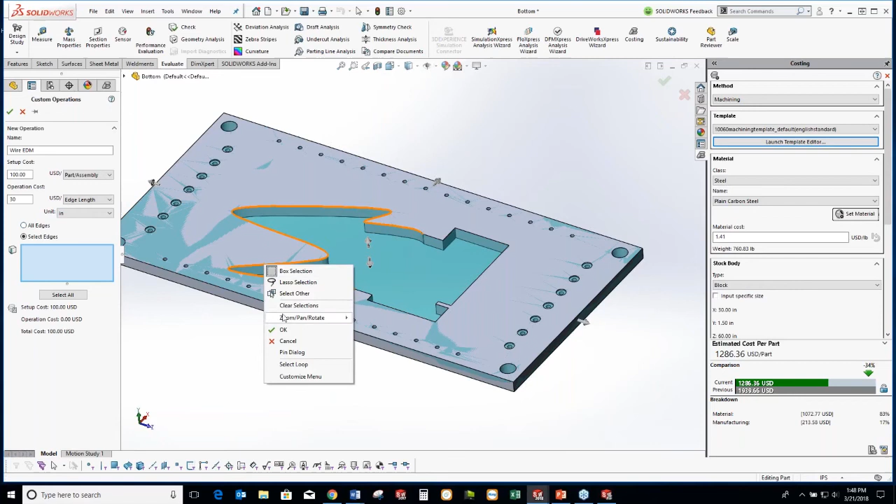Now all I need to do, I wouldn't want to pick all edges because that's going to pick every single edge around the part. I need to go around making sure I pick this correctly, so some ideas here would be to maybe pick one at a time.

I do have to go back and change to that custom operation. I didn't actually select some of these. I want to make sure I select all of these, or maybe just select most of these, since time is running out.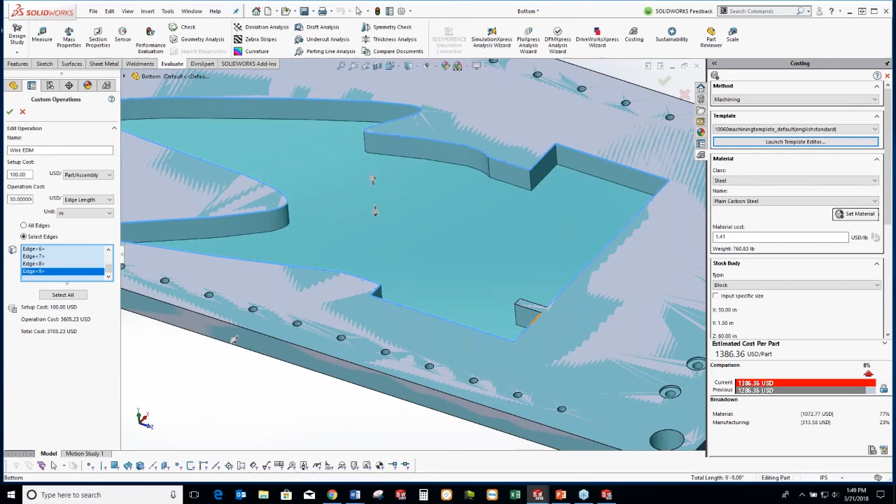What I can do is just quickly measure out how long of an edge that is altogether total. Hit OK, and it's a pretty big part, so that's quite a bit of an expense to get through and put together. You can see that price change immediately, and if I hit save, that updates for the entire assembly.

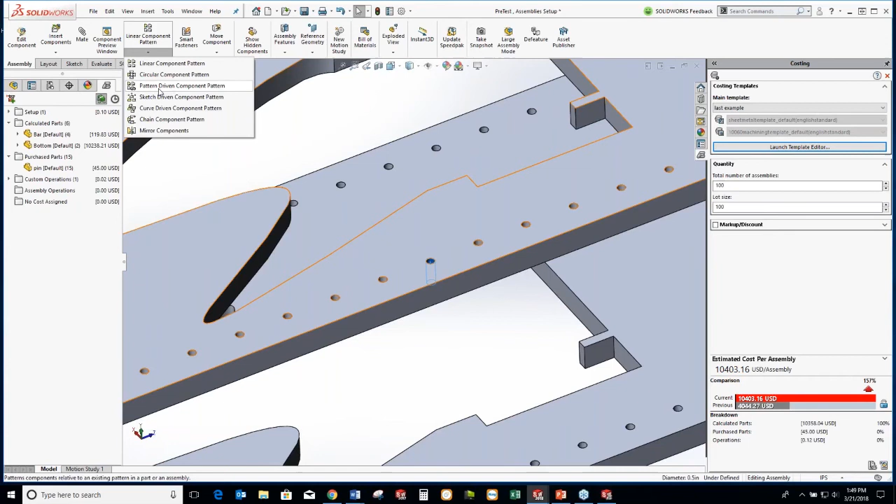So what I'm advertising is taking a look at some of these setups. For the part, I didn't quickly cover how I did this. What I did was put a hole here in the middle, and then took advantage of a pattern-driven component pattern, which allows me to pick the pattern I had put together for the part.

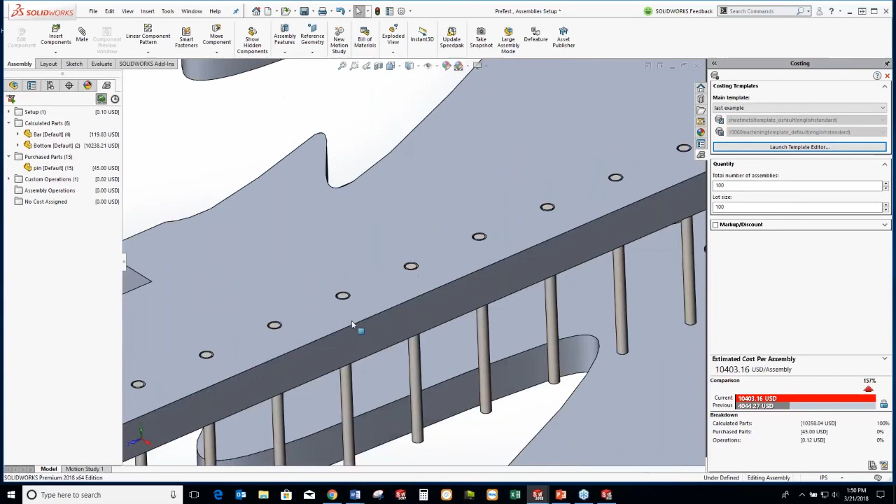Skipping the fact that's how I put together these pins, that's how it updates with these pins along in these holes. So for that would be something like that. But the pattern itself is actually just driven by one hole and then an equation on this end, and stuff like that.

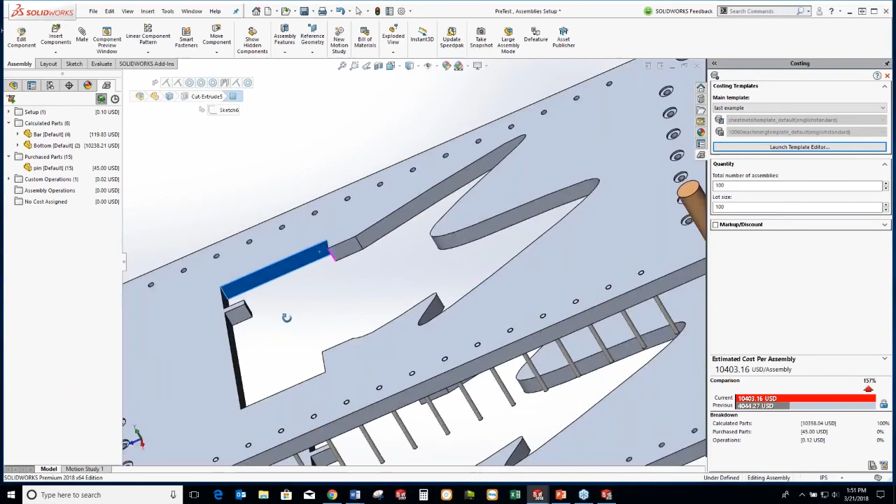I think SOLIDWORKS has put in some effort there, but what we're seeing a little bit is that people are just struggling a bit trying to get onto the costing. So I guess that's what motivated me to introduce some of this stuff to more people here. For my outline, we covered a quick introduction of what it takes for doing the costing.

Again, that's a pro license or premium. Premium would just get you the assembly templates. The templates that are included, you can't make changes to those, but you can definitely save one out and then make edits to that. Makes sense.

Toolbox parts, if you're going to do an estimate on that, you want to do that at the very beginning. You won't see that option down here afterwards.

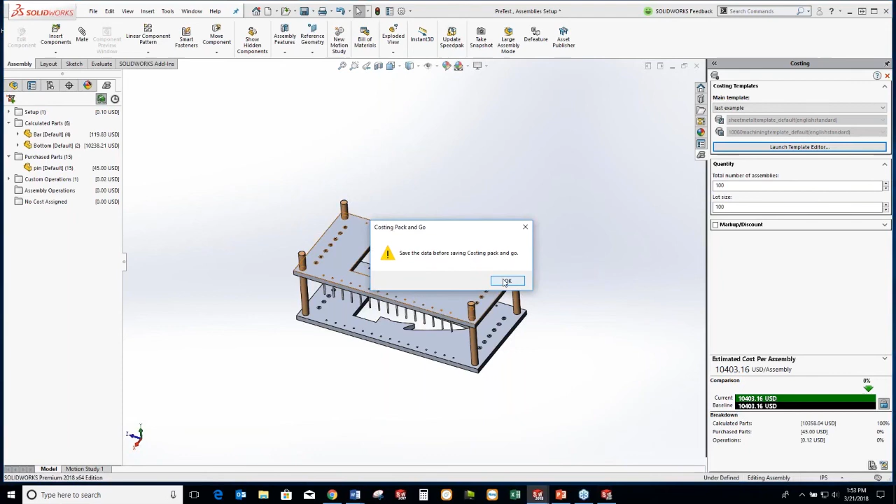Costing Pack and Go, I didn't want to run through that, but it is here for the Pack and Go. I do have to save it, of course, like any file, and then I'd be able to hit the Pack and Go.

Some of these features can be split. So say, for instance, if I'm gathering together into these areas, some of these pockets or whatever - this may not be the best example - but I can also add semi-finishing, finishing, and that can also be broken up apart again too.

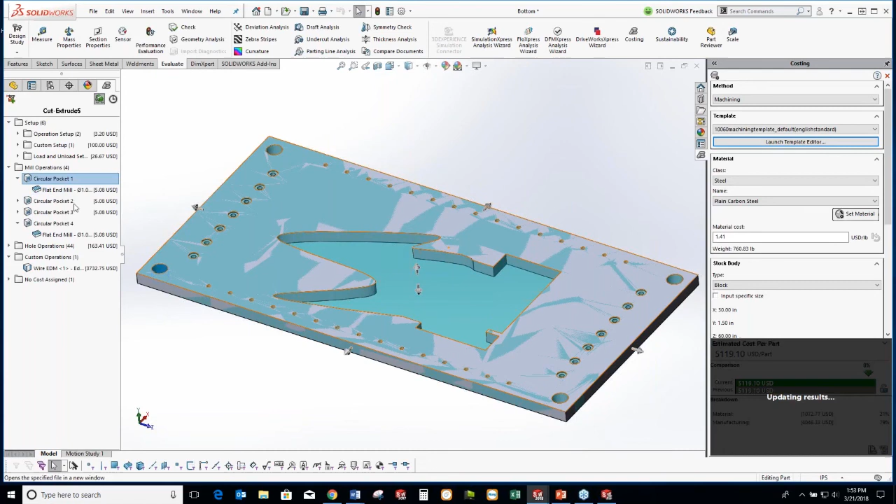The other thing too, new in 2017, was alternate quantities. Assembly operation, we saw how we were able to, at the assembly, kind of put together some costs for putting this stuff together. This one we didn't do that too, so add assembly operation, maybe this one at $100 an hour, and we say, well, this is going to take 2 full days.

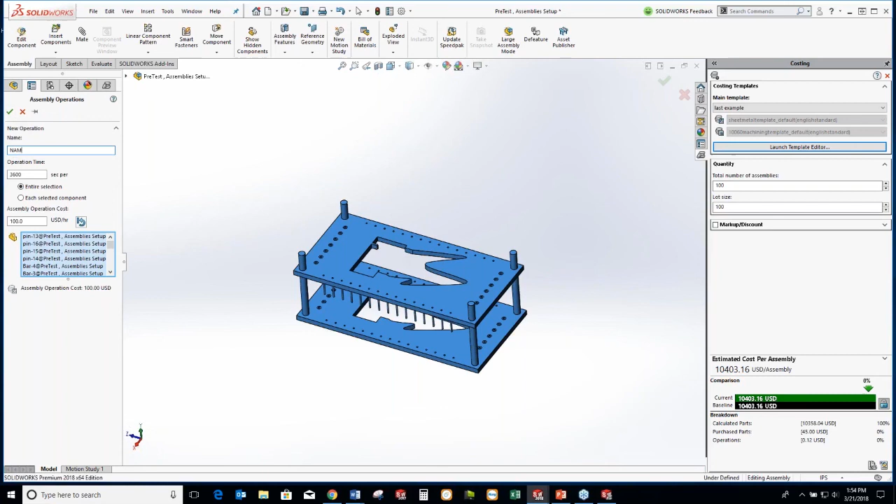Oops, it's definitely not 16 seconds, but whatever that would come out to be, maybe I'll just simplify that to 3,600, and then I want to make sure to add all those parts into this component. Give it a name. Oops. And hit OK.

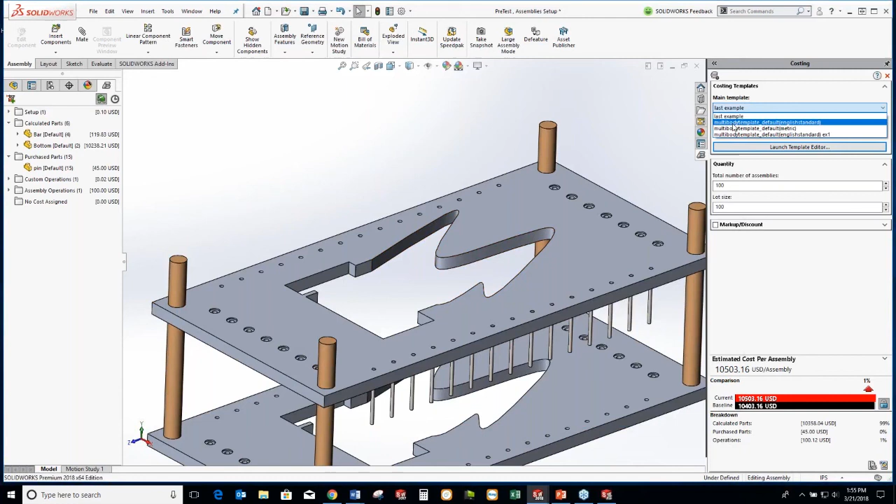Oh yeah, I guess one last thing, if I still got everybody on here. I did kind of skip through on the idea here. I didn't want to spend too much time on it, so I'm just going to quickly show it. So if I launch this here, I can come up to, let's say this, not the sheet metal actually. Let's click on main, click on the edit and get the machining.

I can take a look at rules base. So this one's kind of a nice one. So say, for example, this is fine as far as creating your system or whatever it is, but maybe certain things like the size of it are going to really make a difference after a certain change in size. So you do have a ton of these different kinds of conditions.

So if the material chosen is specific to something that you've put down, then make that change. If, say, for example, the model weight goes above a certain size, that might change stuff for shipping and just create a hassle that you might want to go ahead and add a cost to immediately. So say, for example, if model weight is between a certain amount to another amount, let's say maybe above 250 pounds to 2,000 pounds, we want to definitely add some sort of cost there, whatever that is.

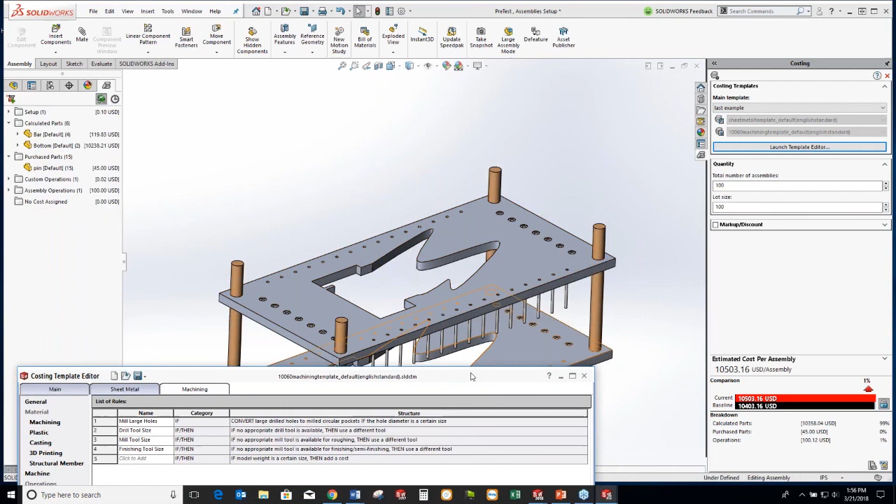And just make sure that we're accounting for things like that so that whoever's working with this template has that kind of automatically populated. And again, you don't have to make those changes at the end. So, for example, you can always change the final price of it, but I would stay away from doing that if you can make sure to have that in the template.

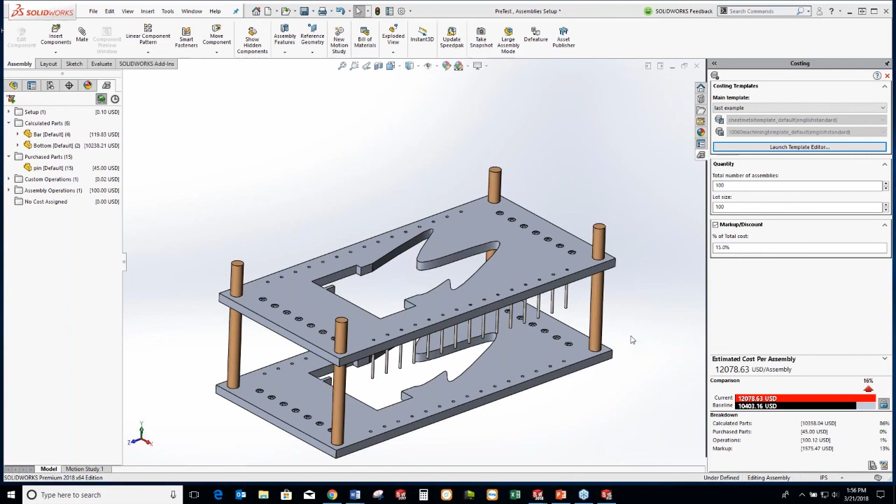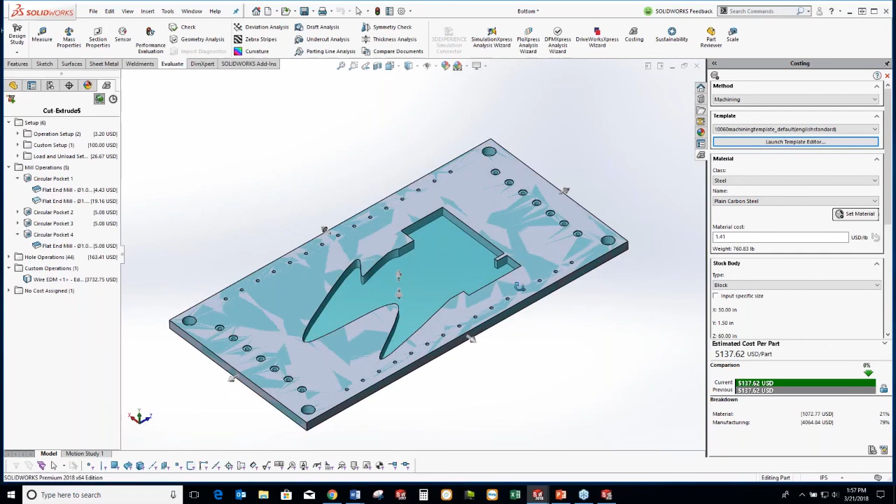All right, well, it's been fun to talk about the whole thing. It's a little bit different for me than having a classroom full of people where I'm showing everybody, making sure that they know how to use the software. Also in tech support is where I spend a good amount of time too. So I do field all kinds of questions anywhere in SOLIDWORKS and some stuff in simulation. And then I'm getting more involved with CAM, and I kind of see the nice correlation here to costing, where it can be a beginner guide.

Hopefully this does help out. I know a lot of the people who do quotes are in such high demand that they sometimes can't take vacations, or if they do go on vacation, they have to do quotes. So maybe that could be an idea for putting this together for you guys to use, and maybe start considering it as a backup, or at least to see how consistent your quoting is, and see if it does help you guys categorize that and then reduce time later.